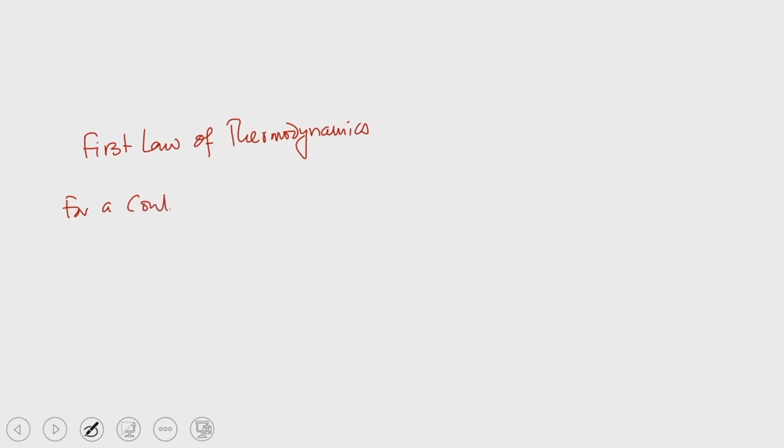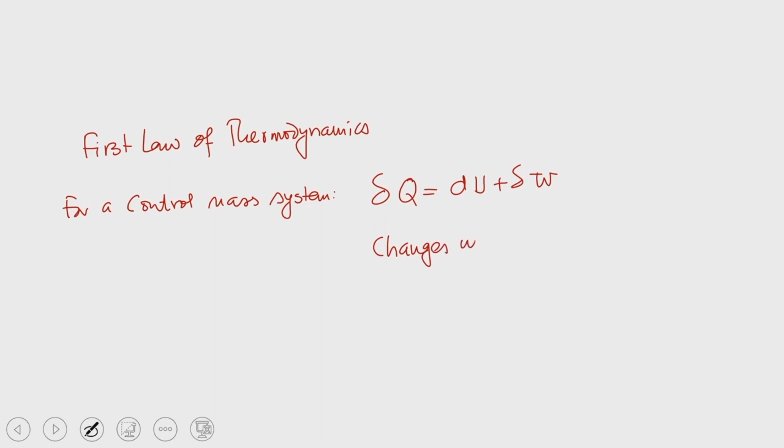So just for recapitulation, whatever we discussed in the last class: for the control mass system, we could write the expression like this. Here one important assumption is that the changes in kinetic energy and potential energy are neglected. It is because of this assumption that we could write change in energy as change in internal energy. So this is the first law of thermodynamics for a control mass system, and this is valid when the process is any general process. It is not necessary that the process has to be a cyclic process.

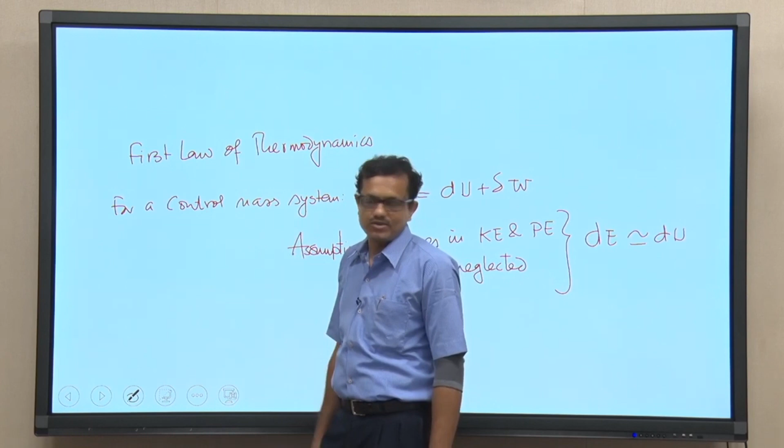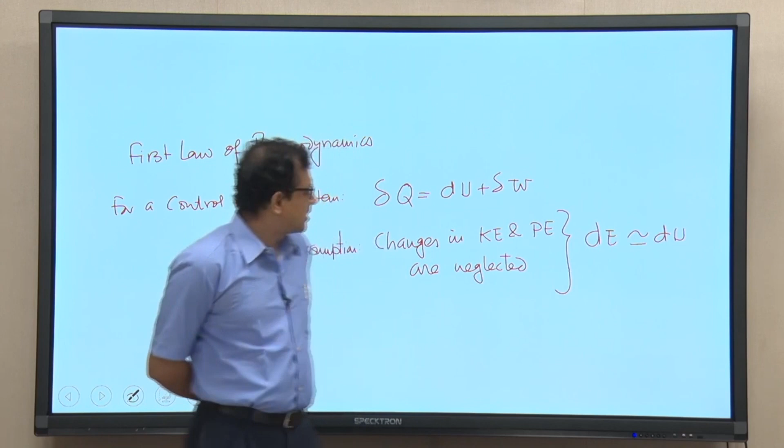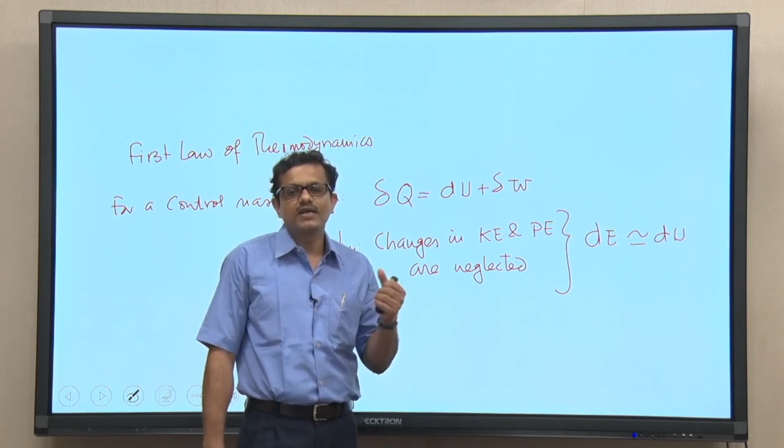Now, as I was talking about the flow system, that is what we should discuss today, for thermal systems in which flow of a fluid is involved. In fact, we shall be discussing all these systems in our subsequent classes. In these flow systems, if you would like to study the transport of energy by heat and work, it is more convenient to express the first law of thermodynamics from a control volume perspective. So this is the first law of thermodynamics for the control mass system. If you would like to express it from the control volume perspective, a mathematical transformation will be required.

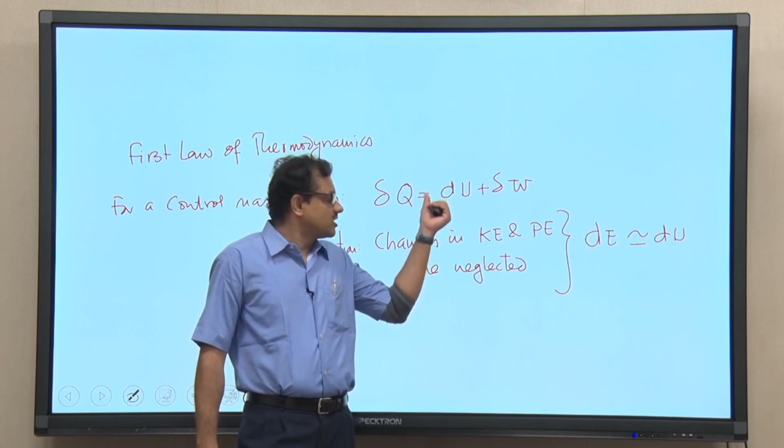So we need a mathematical transformation of this equation, so that we can conveniently study the transport of energy from a control volume perspective. I am not going to discuss this in detail, since you have studied this aspect in fluid mechanics, but you know that if you would like to write the transport equations from a control mass to a control volume perspective, one important theorem is used, known as the Reynolds transport theorem. This theorem is used to express the transport equation from a control volume perspective. So let us try to recall what the Reynolds transport theorem is.

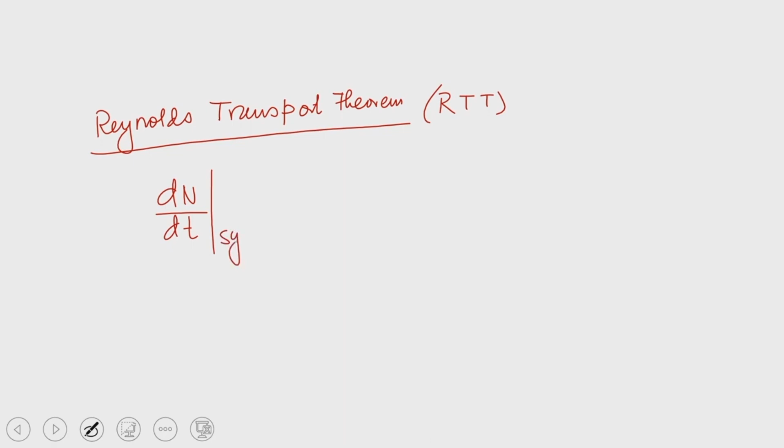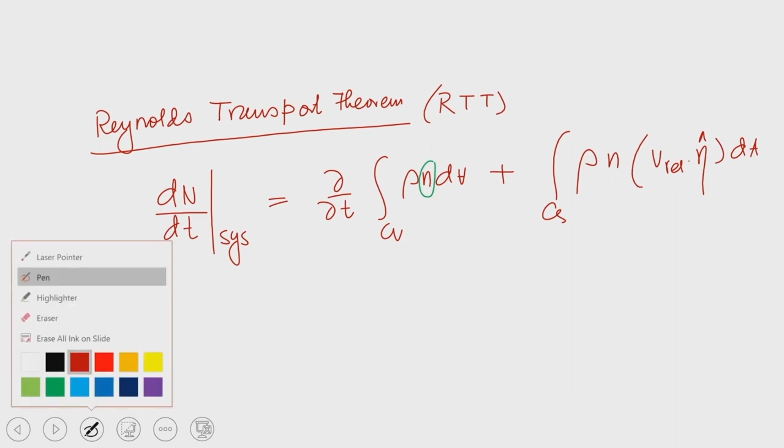So, RTT in short, that is, just I am writing the expression assuming that you have studied this part in fluid mechanics course. Right, so this is the expression, and we should write one important term, just I am marking it. Okay, and then another part is there, that is control surface, again I am marking this particular term, this. So, I am not going to discuss about this particular equation, but this is Reynolds Transport Theorem which is used.

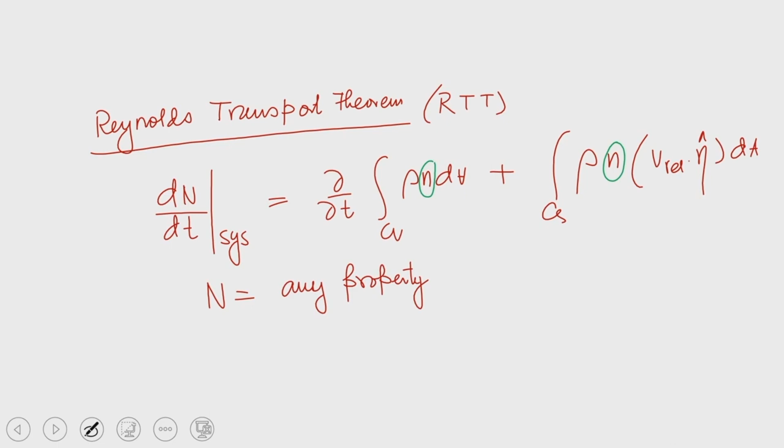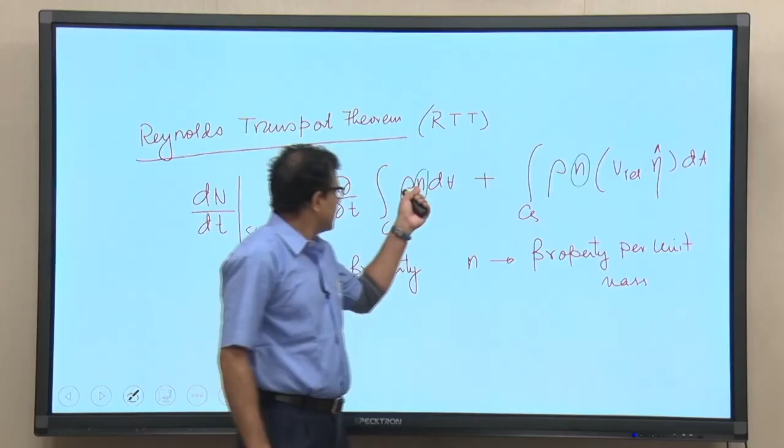This equation allows us to write the transport equation from the control volume perspective. So, you know that here capital N, that is any property, right. You know that this N is essentially abstract, it can be anything. So, it is any property, and small n that I have encircled here, in the first and second term of the right hand side, this is property per unit mass. Small n which is encircled by this green color, which is property per unit mass.

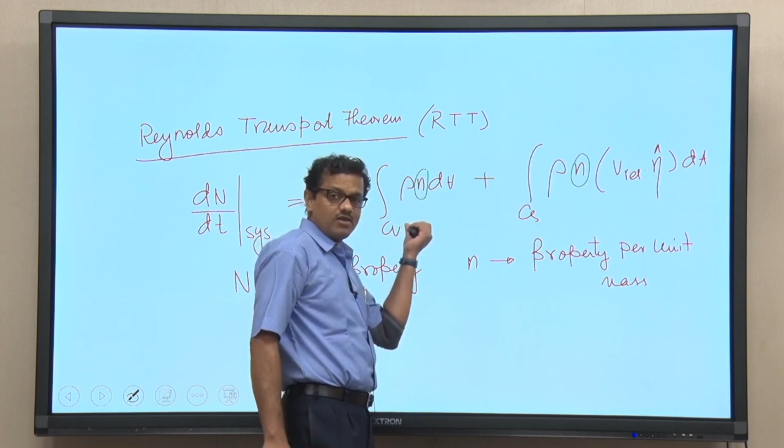So, if we look at this particular equation, you can see that left hand side of this equation is time rate of change of the property, and as I told you, it can be any property of the system, while it is change of the time rate of change of property N within the system. So, the time rate of change of any property within the system can be expressed in terms of the time rate of change of the property within the control volume plus this extra term is there. So, this extra term is the rate of efflux from the control surface through which flow will take place.

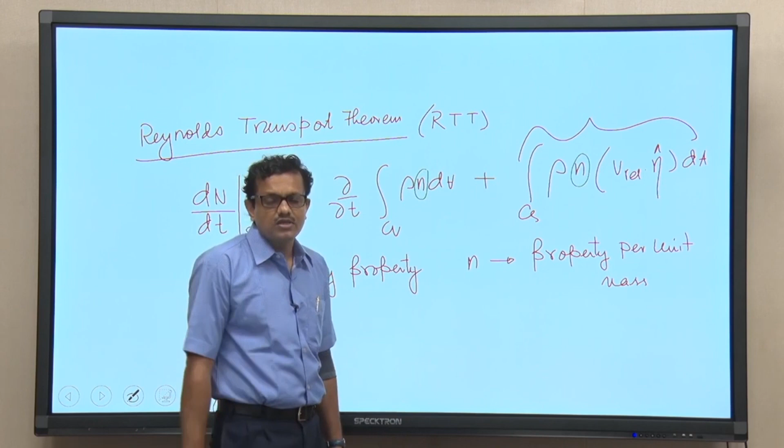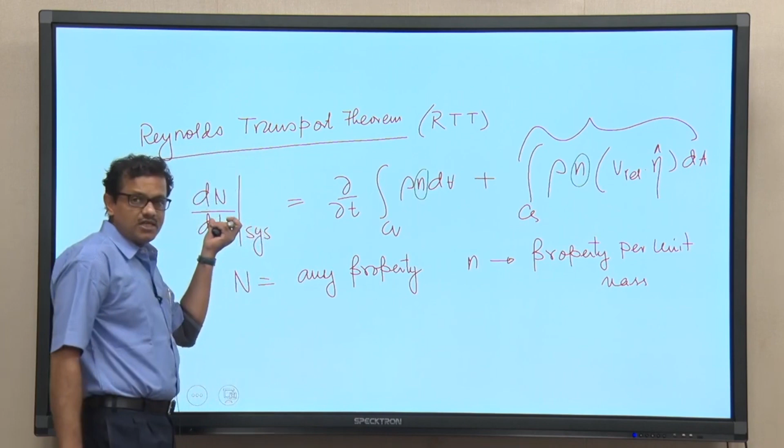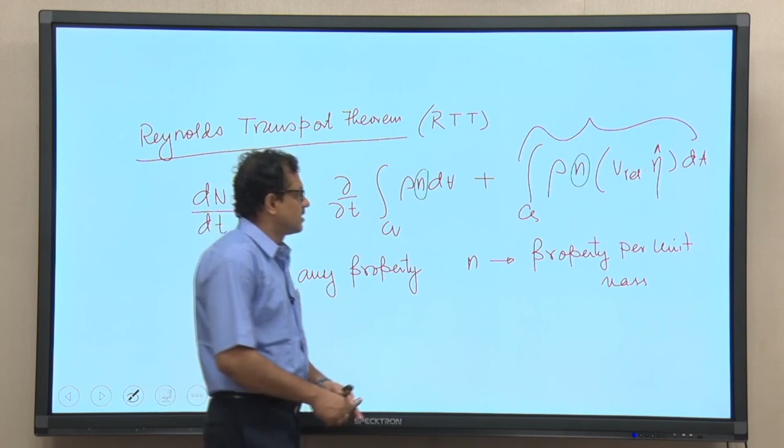As I told you, our objective is to express first law of thermodynamics from a control volume perspective. Why? Because all the systems that we shall study in this course involve the transport of a particular fluid, as a working substance. So, when there is a flow of fluid, the net transport of energy because of the transport of fluid is essentially this term. So, basically this is time rate of change of the property within the system, which can be written in terms of the time rate of change of the property within the control volume plus the rate of the efflux of the property from the control surfaces in which flow is there.

So, it is rate of efflux of the property from the control surfaces where flow occurs. Okay, so let me write it, where flow occurs. Okay, so this is that case.

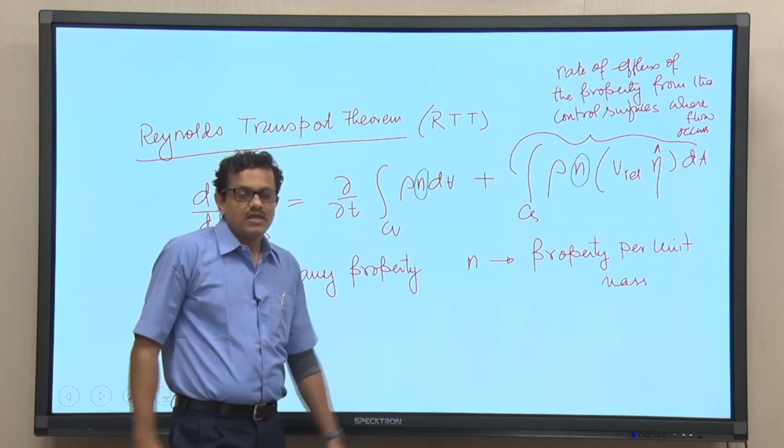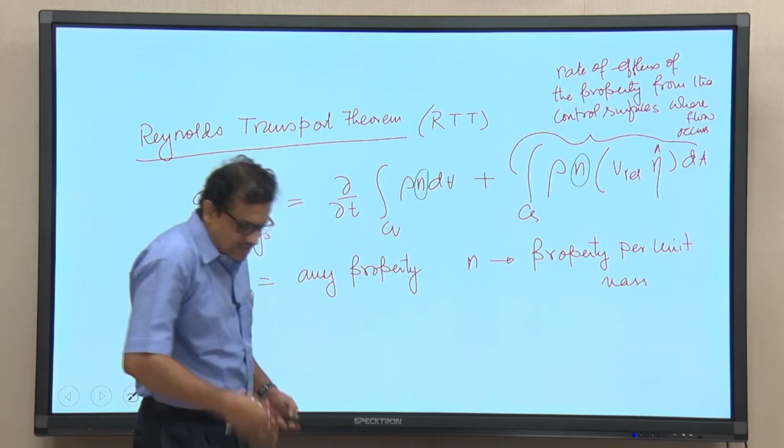Now, as I told you, we shall try to write or express, that means this transformation equation will be used to write the first law of thermodynamics for the control volume system. So that, essentially, as I told you, first law talks about, rather it is a statement of the conservation of energy. So, when there is efflux, for the control volume system there is efflux through the control surfaces where flow occurs. So, now when there is a flow, mass flux is there. So, you know that this term essentially indicates transport of energy because of the transport of mass.

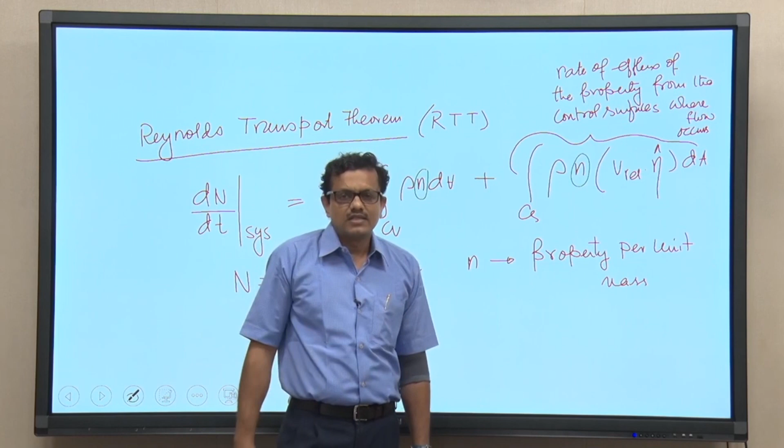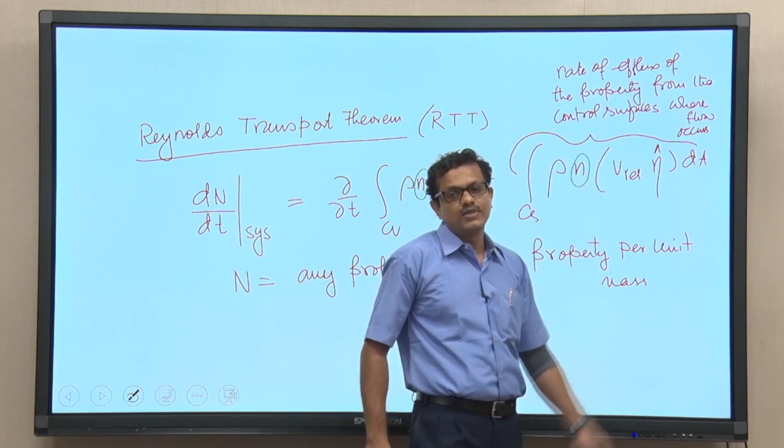In a system, in a control volume system, we may have multiple inlets and multiple exits. So, through multiple inlets there will be a flow, and again through multiple outlets there will be a flow. So, the energy transport due to the mass flow is taken care of by this term. So, why am I telling you this? Essentially, if you would like to write first law of thermodynamics, we also need to have the mass balance equations, because if you would like to write first law of thermodynamics for a control volume, the energy balance that first law essentially talks about is not a balance in an isolated manner, rather the energy balance has to be coupled with the mass balance. Why? Because mass flux is there because of the flow, and the energy transport associated with this mass transport should be taken into account.

So, if we try to write the mass balance using this equation, so mass balance. So, you know why we need to start with this mass balance? Because in a control volume system, when you are trying to establish the energy balance equation, this mass balance is an integral part. So, mass balance. So, when capital N equal to m and small n equal to 1, right.

So, we can write dm by dt system equal to d/dt of the integral over Cv of rho dV, plus the integral over Cs of rho into V relative, with this eta cap, dA, right, because small n equal to 1. Okay, see, small n equal to 1, so I did not write 1 over here and 1 over here. This eta cap, this is a normal pointing outwards. So, outward normals.

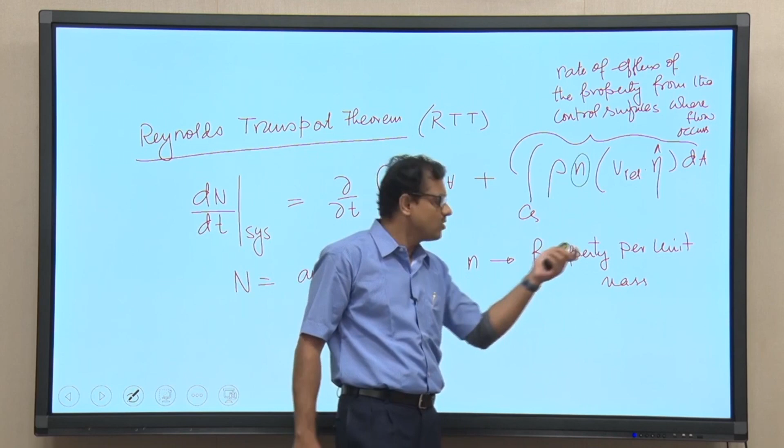So by definition mass is fixed for the control mass system, because this is the definition. So this quantity is equal to zero. What about this quantity?

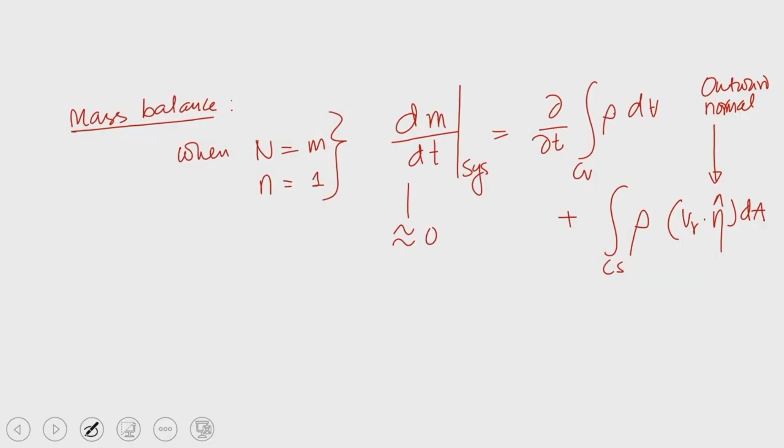This quantity, if I try to write using a different color, is nothing but m_cv. So if we try to write this equation, it is zero equal to d(m_cv)/dt plus...

What is this term? This is relative velocity. This relative velocity can be written as V minus Vc. The control volume is fixed in a reference frame in which velocities are described. So this is relative velocity, which is nothing but the fluid velocity minus the velocity of the control volume. It is by definition.

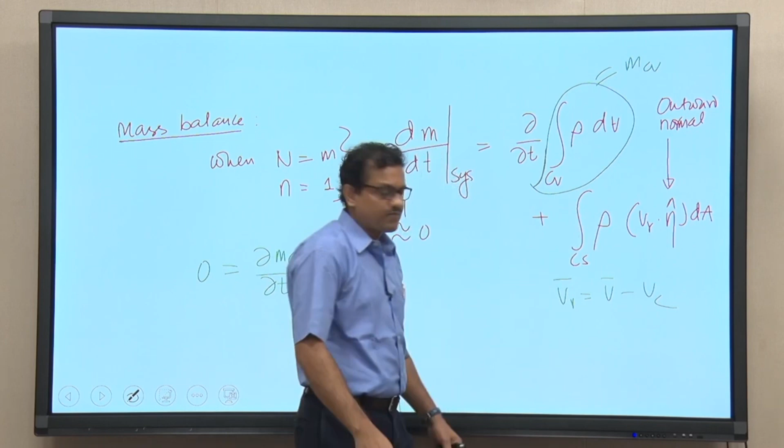Now this term, if you recall, is the flux from the control surface: V relative dot eta cap, integrated over the control surface, assuming that the properties remain uniform, meaning rho remains uniform over that particular cross section, even if we have multiple inlets and multiple outlets through which fluid flow is taking place.

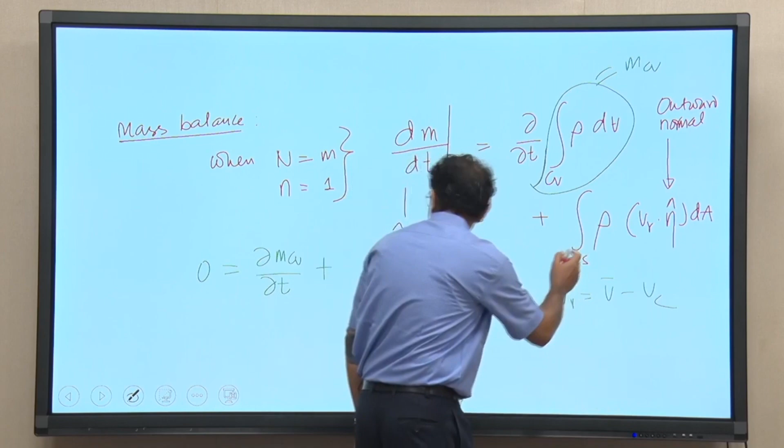So essentially this term is mass flux from the control surface. We will be having mass flux through the inlet and mass flux through the outlet. So if we try to write it, this would be mass flux through the inlet plus mass flux through the outlet.

So this is I, this is E. Here I stands for inlet, E stands for exit. I am using the same notations followed in the textbook. So this is the mass flux, rate of mass leaving from the inlet. If we have multiple inlets and multiple outlets, that is why I have used this summation sign.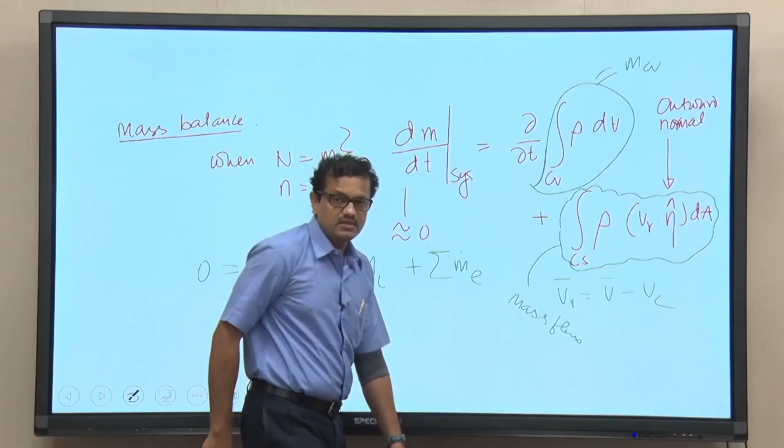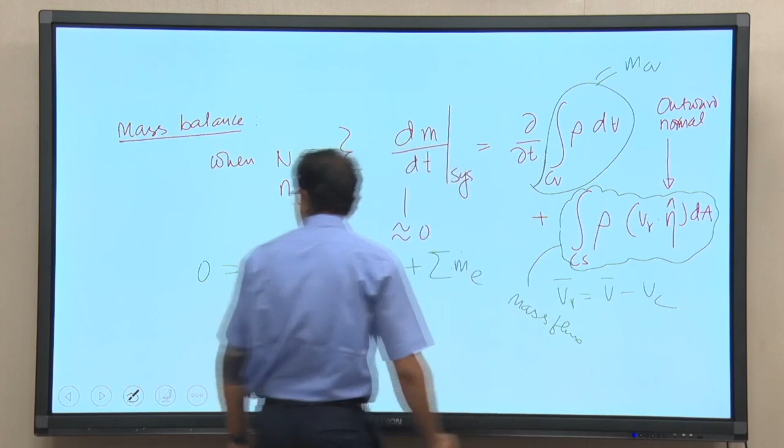Now I would like to discuss this V relative dot eta cap, this is outward normal. If we take a control volume like this, with an outlet and an inlet, you know that V relative dot eta cap is positive for the outlet and negative for the inlet, because the normal is always pointing outward from the control surface. This unit vector, the outward normal, points outward from the control surface, so the dot product will be negative for the inlet and positive for the outlet.

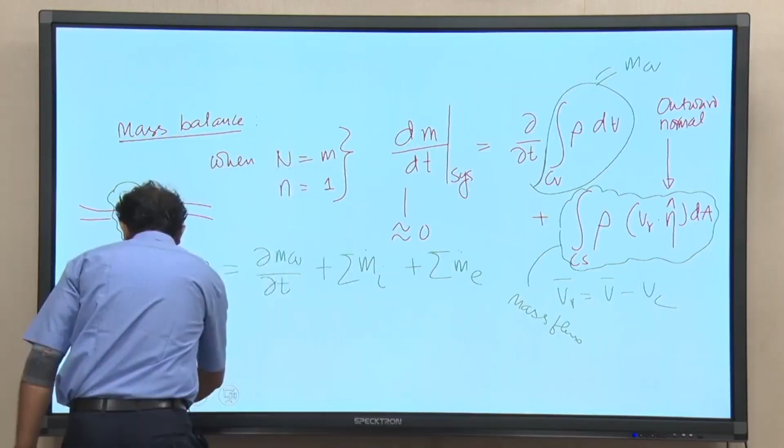So if we try to write it correctly, it would be positive for exit, negative for inlet. Rather, I can write it in a form that is exit minus inlet. So this is basically the mass balance equation. Again, E stands for exit, I stands for inlet.

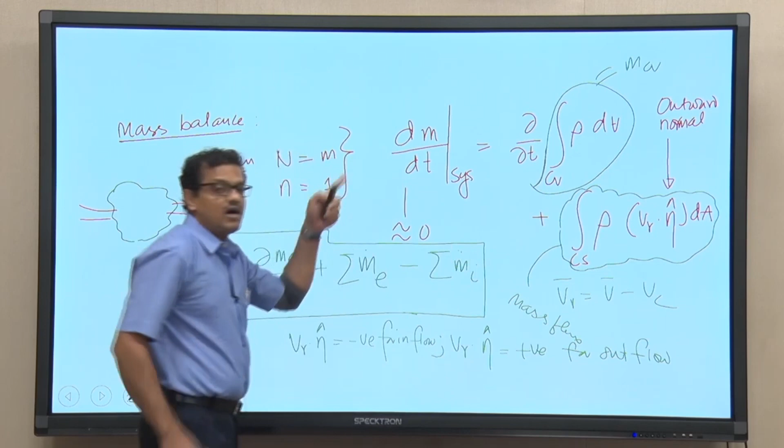I have discussed the sign convention because this V relative dot eta cap is positive for outflow and negative for inflow. That is why we considered this particular sign convention in the equation. So this is the mass balance equation, and the summation sign is taken if we have multiple inlets and multiple exits. Try to understand, by using this equation, that is the Reynolds transport theorem, we could write the mass balance from a control mass system to the control volume system.

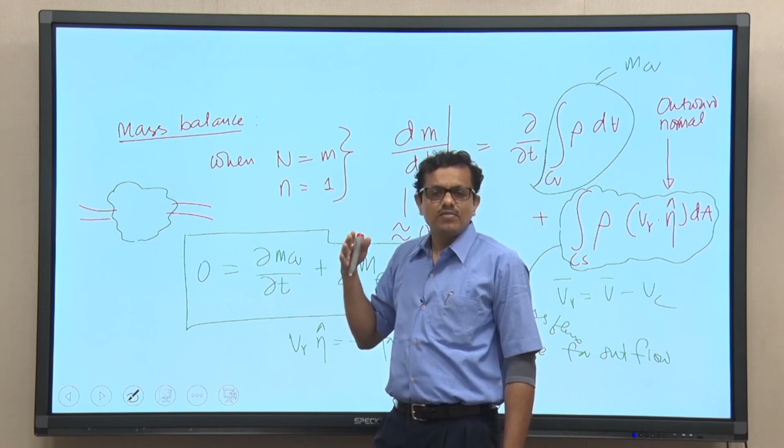Next we are going to discuss the energy balance. As I told you, n is abstract, it could be anything. So say it is capital E, that is what I am writing. Since we are trying to write the energy balance equation from a control volume perspective, we are using this Reynolds transport theorem. Now n, as I told you, can be used to describe any property. So here we are writing E, therefore small n will be equal to small e, which is specific energy. So if we try to write the Reynolds transport theorem...

d/dt for the system equals d/dt of control volume rho e dV plus control surface rho e V relative dot eta cap dA.

Mind it, the small e is the specific energy, right. So, this is what we can write. Now, it is very important that...

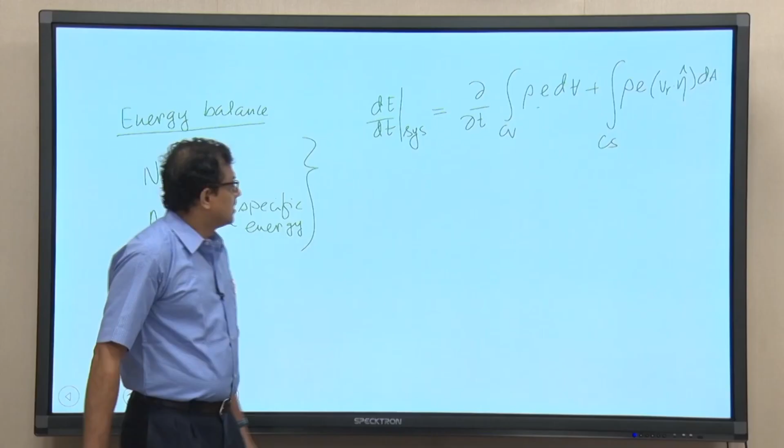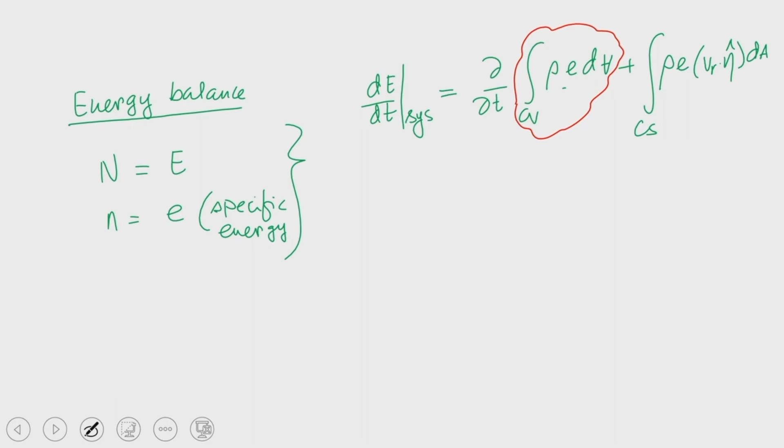What we can do further, this is essentially this left hand side gives us a clue about the change in energy within the system. So, it is essentially the first law of thermodynamics, and this part, if I try to write using different color, this part can be written.

One important assumption that I could not write over here is that I am writing properties are uniform over the respective cross sections through which flow occurs. So, this is an important assumption which is used to describe this equation.

So, here we can write this is del del T of rho dV. Again I am telling, if we take that this is within the control volume, so this is capital E C V, right. So, rho dV, that is mass times small e, may vary within the control volume, but if we multiply with that mass we will be getting total energy.

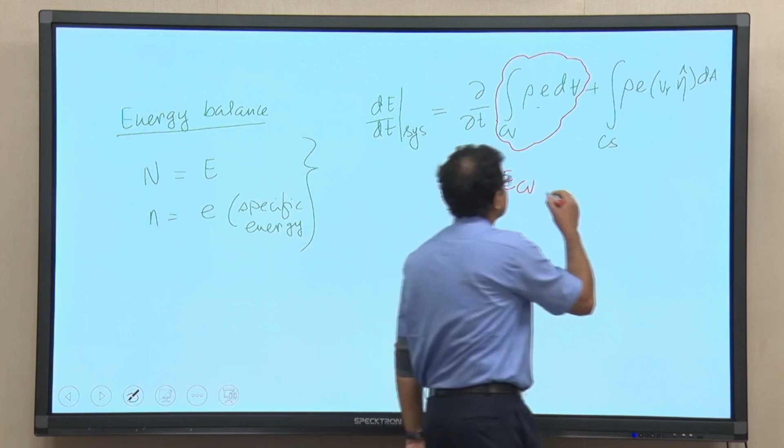So, this expression, this quantity can be written like this, plus I can write this expression in this form, that over the control surface, rho e Vr dot eta cap dA. We shall come to this particular term later.

Now, as I told you, this gives us information about the change of energy within the system, the time rate of change of energy within the system. I would like to tell you one important thing in this context, that you have studied about thermodynamics, right.

So, why we are calling it thermodynamics, why not thermostatics, right. In thermodynamics, the word dynamics is coming from the fact that whenever we are trying to study something, or rather whenever we are trying to describe something which is having time rate of change of any property, basically time rate of change of anything, if you would like to study, then only the word dynamics will come into the picture.

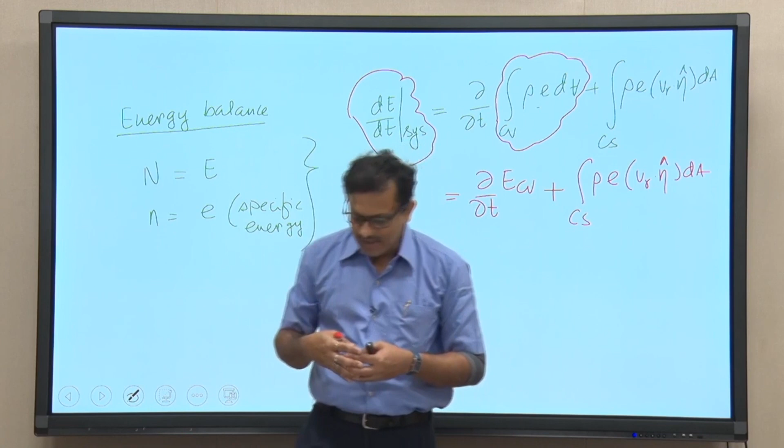So, this gives us an impression about the first law of thermodynamics of a control mass system. So, basically if you would like to know the time rate of change of energy within the control mass system, then what we can do, this is the change of energy within the system, and that is basically, again I am telling, essentially...

giving us a clue about the knowledge of the first law, right. So, as I told you, first law essentially talks about the energy conservation. So, it is a statement of energy conservation. So, this term, the left hand side term, which is giving us the time rate of change of energy within the system, that is giving us a knowledge about the first law of thermodynamics. So, this fellow can be written from the first law which is applied to a control mass system.

So, if we try to write first law applied to the control mass system, that is nothing but del Q equal to dE plus delta W, right. If we again ignore the changes in kinetic and potential energy, then we can write it in this form, dU, but we are writing, since we are trying to express the general form of the first law of thermodynamics, it is better to write E.

Now, see, you can see that this quantity is basically written in the time rate form. So, this is first law for a control mass system. Essentially that is the change of energy within the system.

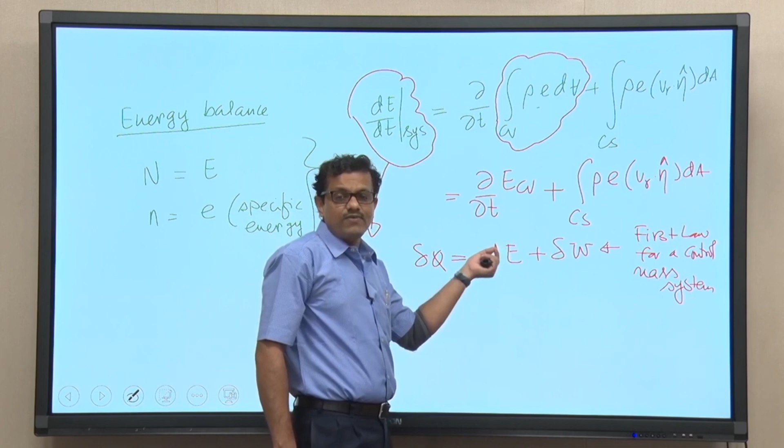So, if we try to write in the rate form, what we can write? We can write like this, say del Q and del W and dE, all these quantities are written in the differential form, but we have to keep in mind that Q and W are path functions. So, we have written them in the form of inexact differential, wherein E is the point function, because this is the property of the system, and that is why we could write it in the form of an exact differential.

So, now if you would like to write these quantities in the rate form, we can write like this: delta Q by delta t as limit delta t tends to 0, equal to limit delta E by delta t tends to 0, plus limit delta W by delta t tends to 0.

Let me tell you one important thing about why we are considering delta t tends to 0. The derivation of the Reynolds transport theorem is based on the important assumption that delta t tends to 0, meaning the system and control volume are coincident. If you can't recall the derivation, consult any standard fluid mechanics book. You will find that the Reynolds transport theorem is derived based on this assumption, considered keeping in mind that the overlapped area, the system and control volume, will coincide. That is why we have written delta t tends to 0.

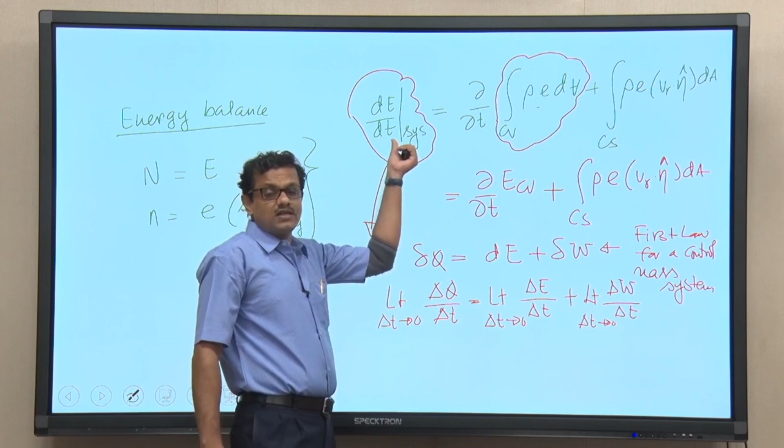Our objective is to express the rate of change of energy from a system to the rate of change of energy to the control volume. So basically we are trying to express the rate of change of energy from the control volume perspective, and that is why we are trying to do it.

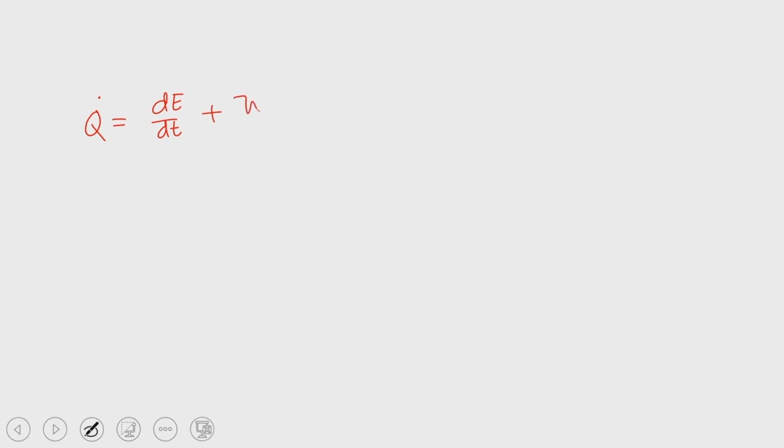So we can write q dot equal to dE by dt plus w dot. If we write it in the next slide, we have q dot equal to dE dt plus w dot. Hence, we can write this for the control mass system: d dt for the system. So this is for the system, meaning d dt for the system can be written as q dot minus w dot.

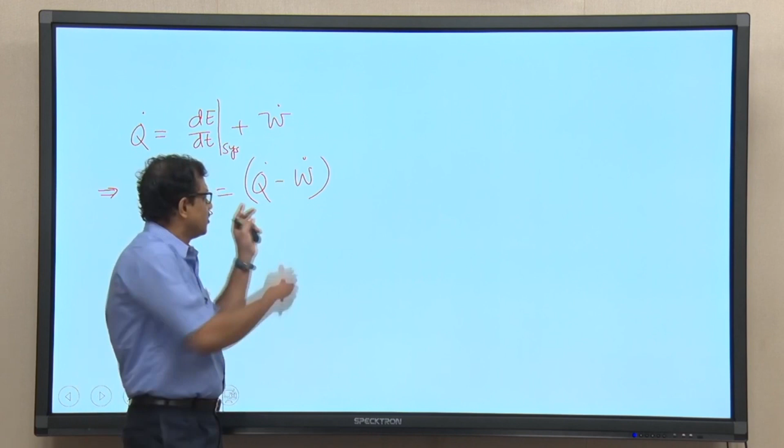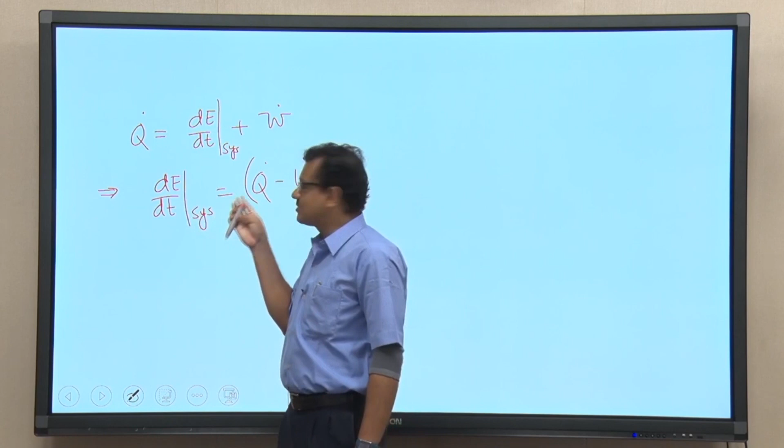So should we write q dot minus w dot for a system or for a control volume? It is essentially for a system. The quantity on the right hand side of this equation is applicable for the system, since we have written d dt for the system. So q dot minus w dot is also for the system, but we can write this quantity to be applicable to the control volume as well.

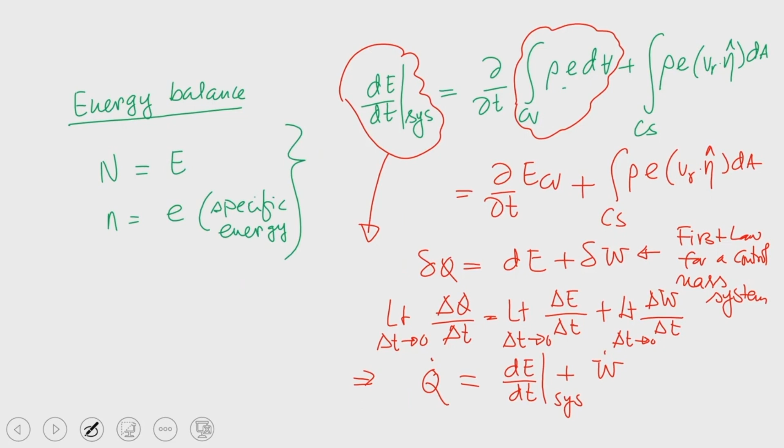Why? Because we have taken the important assumption that delta t tends to 0, so system and control volume are coincident, and that allows us to write this. So if we look at the expression, d dt for the system can be written as q dot minus w dot for the control volume, equal to d(E cv)/dt plus the integral of rho E times V r dot n cap dA over the control surface. So this is what we can write.

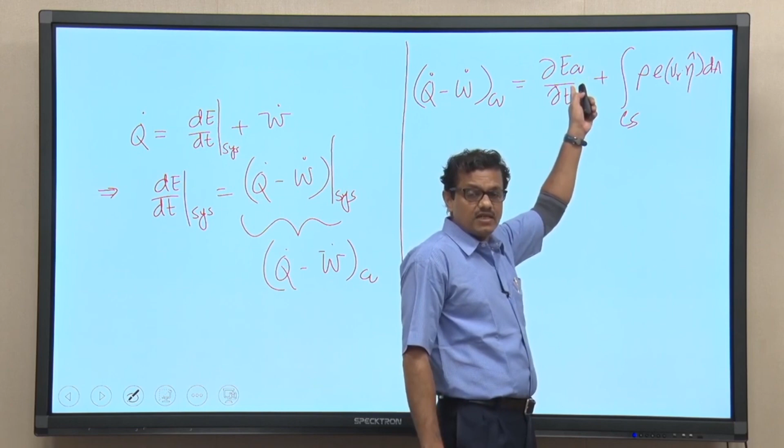Now I would like to tell you, starting from the first law of thermodynamics for a control mass system, we could derive this expression. Here q dot is the time rate of change of heat within the control volume, minus the time rate of change of total work within the control volume, which is nothing but the time rate of change of energy within the control volume plus the rate of energy flux - the rate of energy into and out of the system because of mass flux.

Now consider this w dot. If we write it using a different color, this w dot has two different components. What are they? Even for a control mass system, there will be w dot, because it is energy transport either by heat or by work, as you've studied in thermodynamics - energy transport either by heat transfer or by work transfer.

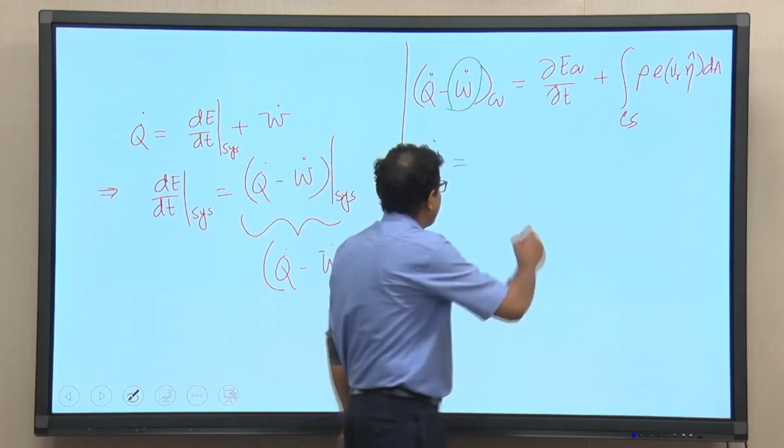So if we write this w dot, one component will be w dot C v, which is basically the work done within the control volume - either work is added to the control volume or work is taken away from the control volume.

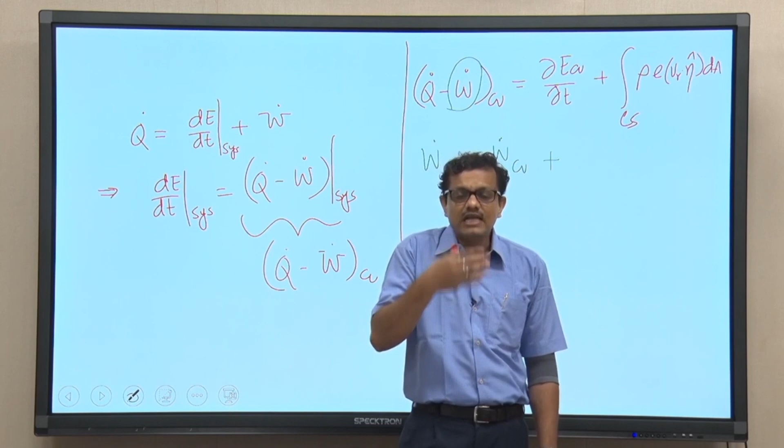On top of that, one additional component will be there. Try to understand, because we are studying the first law of thermodynamics for a control volume system, and most thermal systems discussed in subsequent classes involve transport of a fluid. When there is flow of fluid within this control volume, a part of work will be associated with that, because to maintain the flow in the presence of a pressure difference, you have studied in fluid mechanics that flow will not take place without it. So to maintain continuous flow in the presence of a pressure, there will be work done. This work done I am writing as flow work.

So, this is the control volume work. Basically, this is total work. This part is the work done by the control volume, or work done on the control volume—either work is added to the control volume or work is taken away from it. On top of that, this component takes care of the intrinsic work done associated with maintaining the flow.

In the presence of pressure, if this part of energy is not there—if we do not have energy associated with the transport of flow—then flow will not survive. So basically, to maintain the flow, some part of energy will be associated with that, and that is W dot flow. So if we try to write this equation: Q dot minus W dot minus W dot flow.

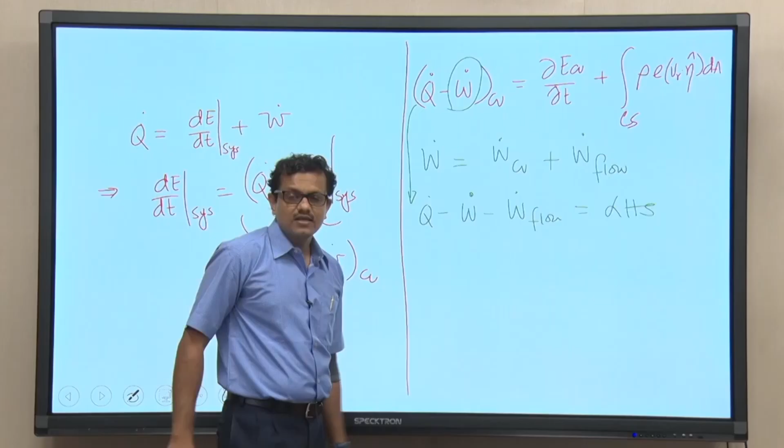Okay, so this is the left hand side. I am writing the left hand side. So what is flow work? You know you have studied this in fluid mechanics. Say we have a channel, a parallel plate channel.

A very simple example I am taking: if we need to have continuous flow, say we have a control volume, and the control volume has one inlet and one outlet. So there is continuous flow into the control volume and continuous outflow from the control volume. So this is outflow, and this is inflow, and this is CV.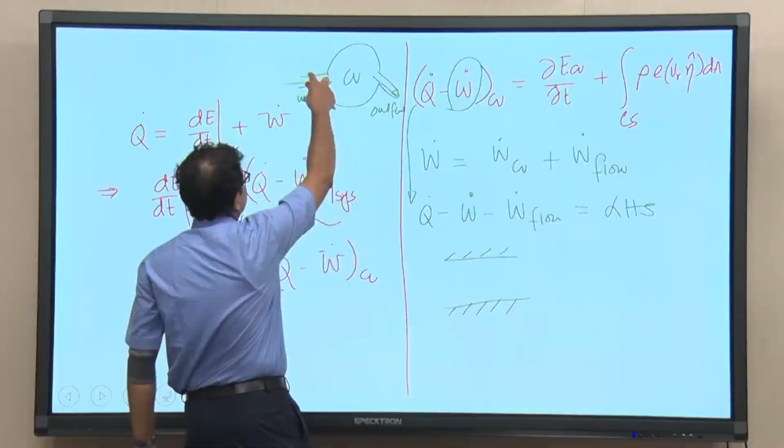If we need to have continuous inflow and continuous outflow, some part of energy should be associated with that, otherwise it would be difficult to maintain the continuous flow. So if we take out this small part and consider it—say this is the inflow part—I have drawn the zoomed in view.

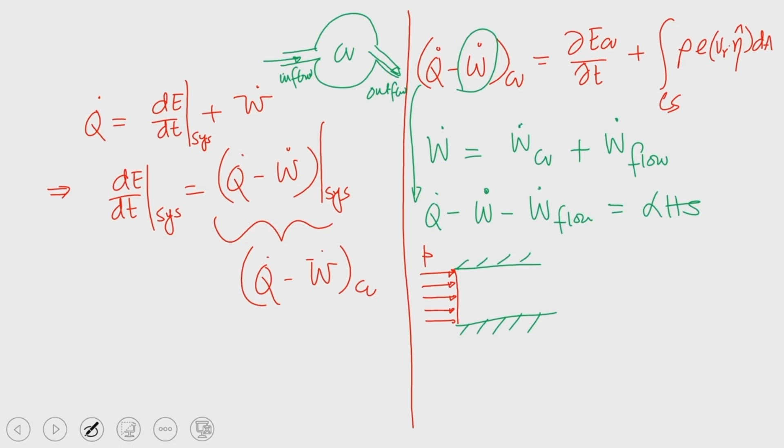So if we have pressure, continuous flow at its inlet, and if we consider pressure here is P, it is because of this pressure that the flow has advanced a distance, say delta x, through the channel. So this is the inlet channel.

Now, to maintain the flow in a continuous manner, we need to have flow work or work done. So work done to maintain the flow in the presence of pressure—if we assume that the length of this particular portion is so small that the pressure remains almost constant—we can write work done to maintain the flow is equal to P.

So, P into A, that is force into displacement, so that is work done. If you would like to write it per unit mass, so this is work done per unit mass, equal to P A delta x.

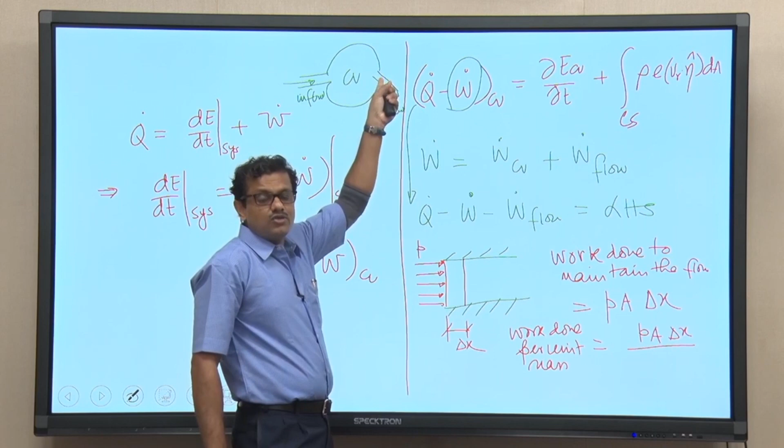If we consider that the density of the fluid is rho, and that is also remaining constant in this cross section—as I told you, properties are not varying over the cross section through which flow occurs—so basically mass would be rho into A into delta x. So you can see this is nothing but P by rho. That is what you have studied in fluid mechanics, known as flow work. So the energy required to maintain flow in the presence of pressure is P by rho.

In thermodynamics, it is convenient to write this in terms of the specific volume, because the specific volume can be easily calculated from linear interpolation from the property chart. So this is the specific volume.

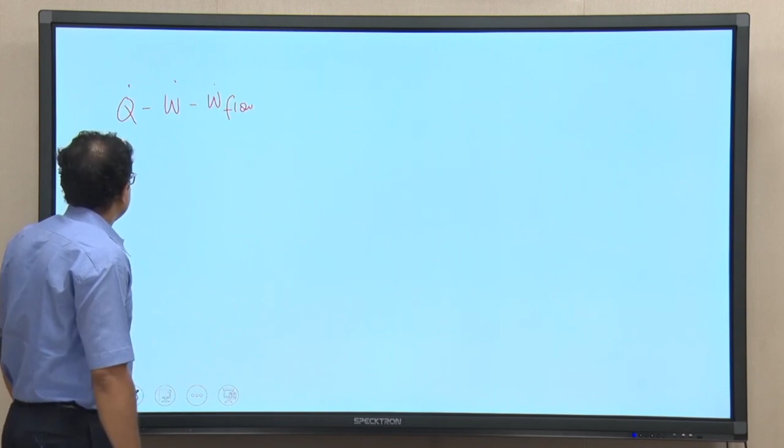So if we try to write the equation again: Q dot minus W dot minus W dot flow—I am not writing CV, I have just omitted it—so basically this W dot is work done by the system or on the system, whether work is added to the system or taken away from the system. You know flow is there, and on the other hand some amount of work done will be there within the control volume. So that is nothing but dE CV dt plus rho e Vr dot eta cap dA.

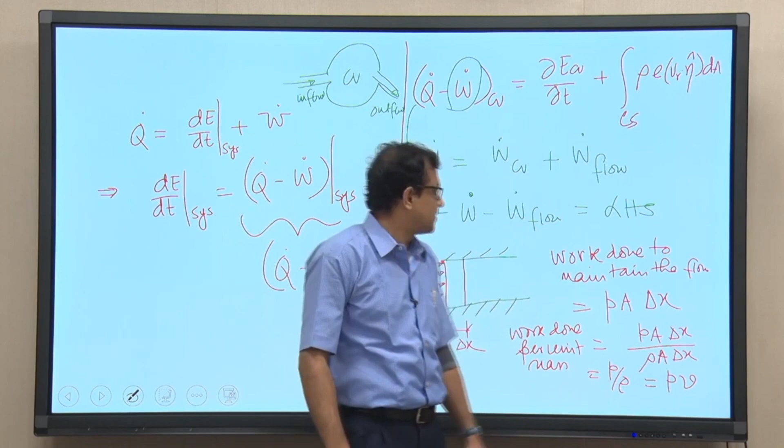We have written this as work done per unit mass, but work done due to the mass flux into the system, and work done due to the mass flux out from the system. So this is work done per unit mass. If we can calculate the mass flux into the system and the mass flux out from the system, then we can calculate the total.

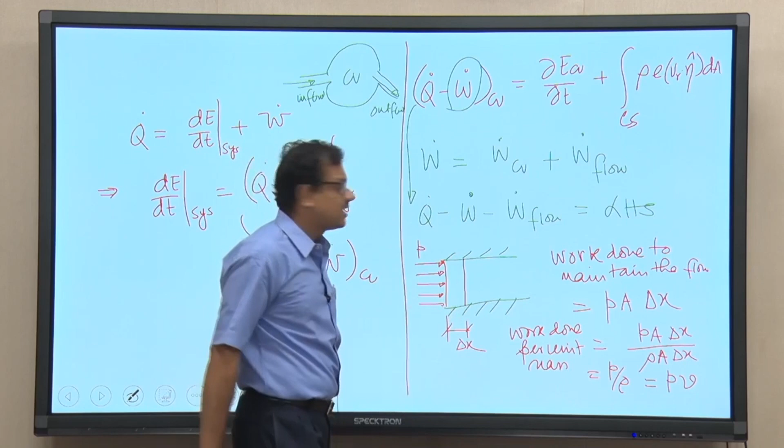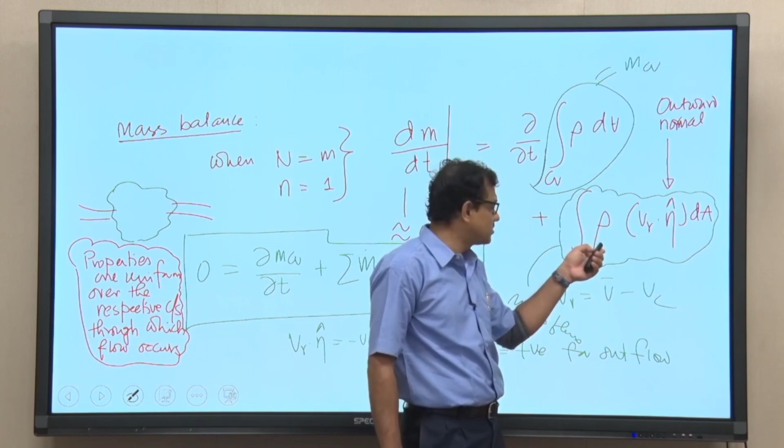So, if we try to go back, this quantity rho Vr dot eta cap dA is mass flux from the control surface, that is mass flux out minus mass flux in. So, if we have control surface at the inlet and outlet, essentially rho Vr dot eta cap dA is the mass flux.

So, we can write this quantity in this form: control surface, P V into rho V relative, that is V relative dot eta cap dA. We can write this.

If we take out this particular term to the right hand side, this is the total amount of flow work due to the mass flux in and mass flux out. So, if we take this term to the right hand side, we can write this equation like this.

Q dot minus W dot, this is work done within the control volume, equal to dE CV dt plus, if we take this control surface rho outside, then we can write

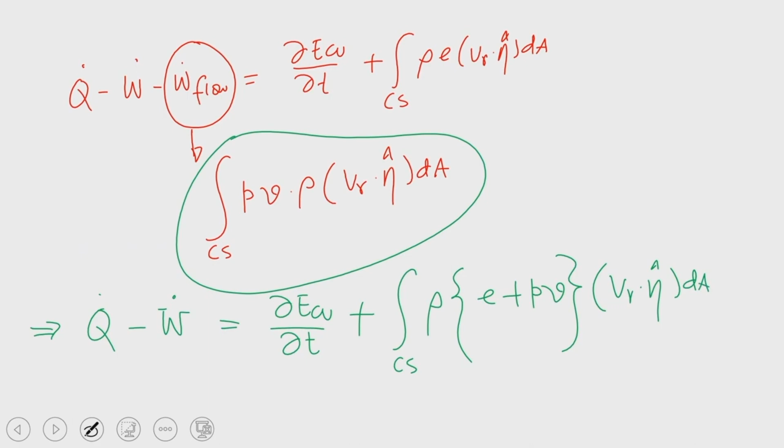E plus PV, E plus PV, V relative dot eta cap dA. So, this is straightforward. What I did is take this term to the right hand side and club these two terms together, so this is E plus P v.

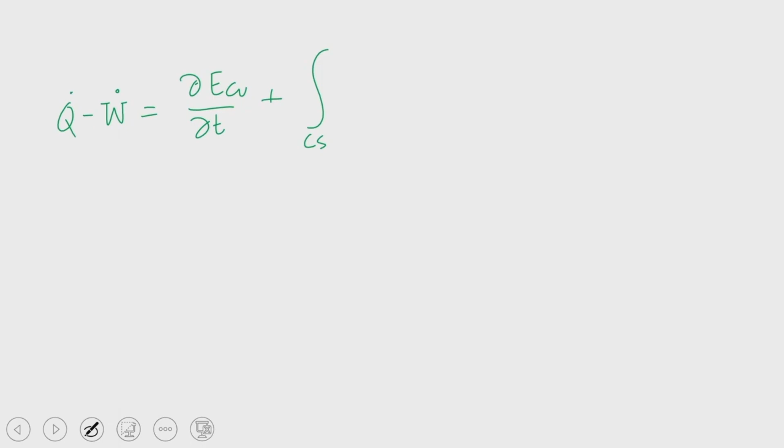What is this E plus P v? Basically, if we write one step further: Q dot minus W dot equal to dE cv dt plus control surface rho into E plus P v into V r dot eta cap dA. What is E plus P v? E plus P v is half c square plus g z plus small u, so this is specific energy.

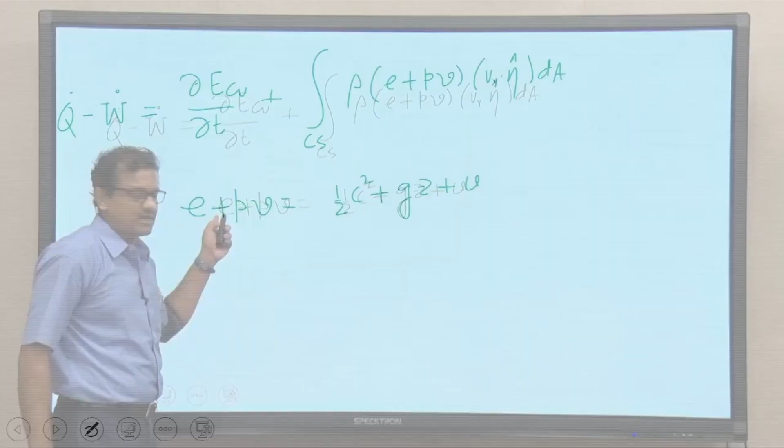So, I am writing half c square plus g z plus u plus P v. You have studied in thermodynamics that if we write u plus P v, we get another important property, that is enthalpy. So, we can write this as H plus half c square plus g z.

So, that means we can write one step further: Q dot minus W dot equal to dE cv dt plus control surface, H plus half c square plus g z, V relative dot eta cap dA. So, this is first law of thermodynamics of a flow process across the control volume. This H plus half c square plus g z is very important.

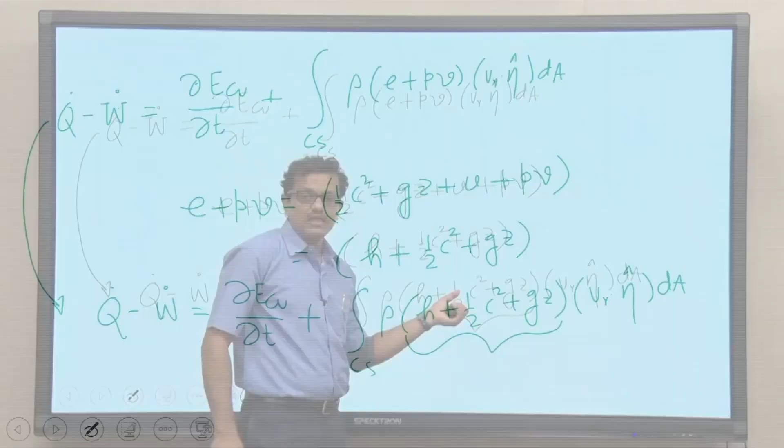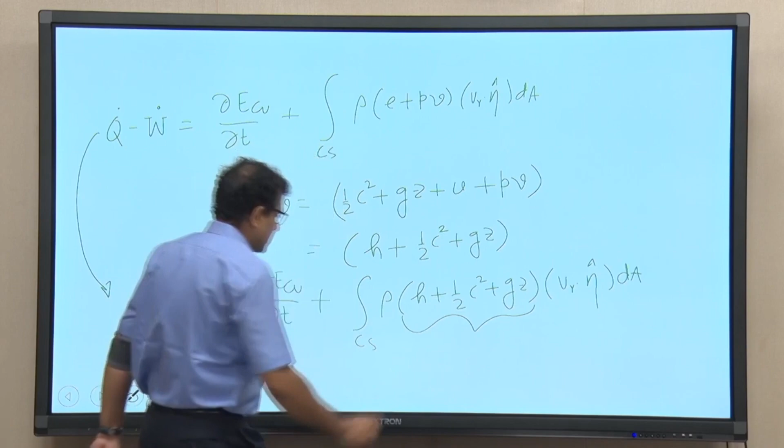So, try to understand, this total part is nothing but U plus P v plus half c square plus g z. So, even if we do not consider the changes in kinetic and potential energies, this quantity for the flow system is nothing but the internal energy of the system plus the energy required to maintain the flow in the presence of a pressure.

So, this is the difference between the control mass and control volume system. For the control volume system, we get one extra term, that is enthalpy, and this is basically the thermal energy for the flow system. So, H is the thermal energy for the flow system, and U is the thermal energy for the non-flow system. This is the important difference.

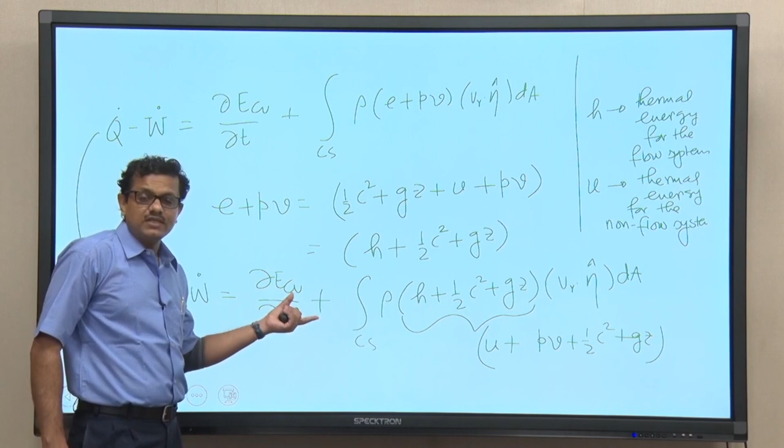One important assumption is there, that properties do not change; we will go a few steps further to describe the first law of thermodynamics for flow processes across the control volume. Taking a few assumptions, we can write this expression in different forms, which we shall discuss in the next class. So, with this, I stop here today. Thank you.